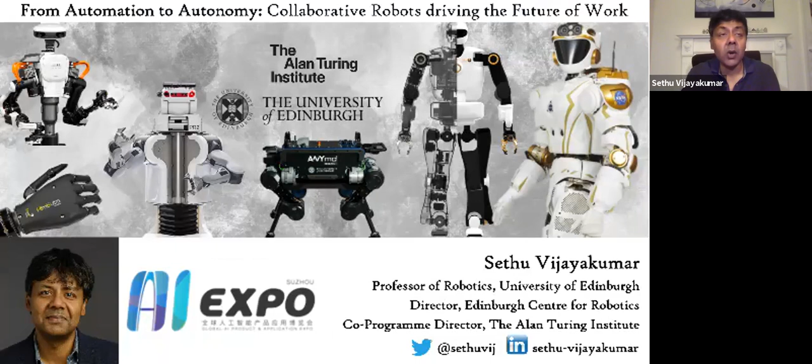So let me start by introducing myself. I'm a professor of robotics at the University of Edinburgh. My name is Sethu Vijayakumar, and I also direct the Edinburgh Centre for Robotics. I'm also the co-program director for Artificial Intelligence and Robotics at the Alan Turing Institute in London.

And today I want to talk to you guys about automation to autonomy. So we have always thought about robotics as a way of automating a lot of work that humans don't want to do, the dull, dirty, and the dangerous.

But I think we have to rethink this definition of robotics. I now think of robotics as something where we use robotics as a tool for doing our everyday work in a much more efficient, in a much more safe, and in a much more productive, economically productive fashion.

So robotics now, I start thinking of it as something which is more as a tool to help you do things better, rather than something which replaces a particular activity or a job that a person does. And that is really going to be the strand of the talk that I'm going to give today.

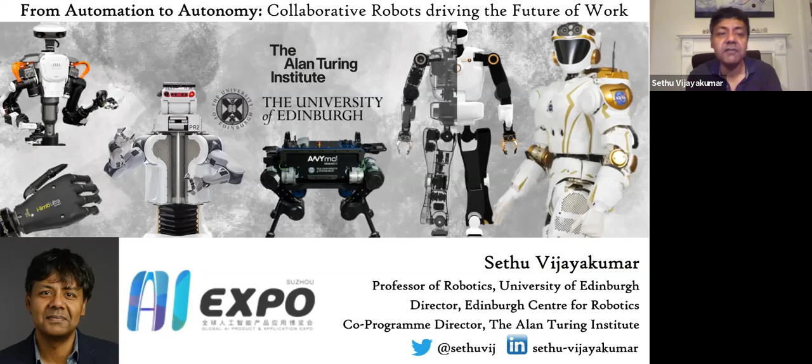I don't need to convince the audience here that robotics is already playing a big part in different walks of our lives, all the way from traditional areas like manufacturing and assembly to very new areas that would not have been possible without robotics, including things like the space industry, underwater robotics for exploration of underwater resources, the nuclear power decommissioning and maintenance industry, and smart cities, autonomous driving, to the healthcare sector, where we have to deal with new challenges in the aging population.

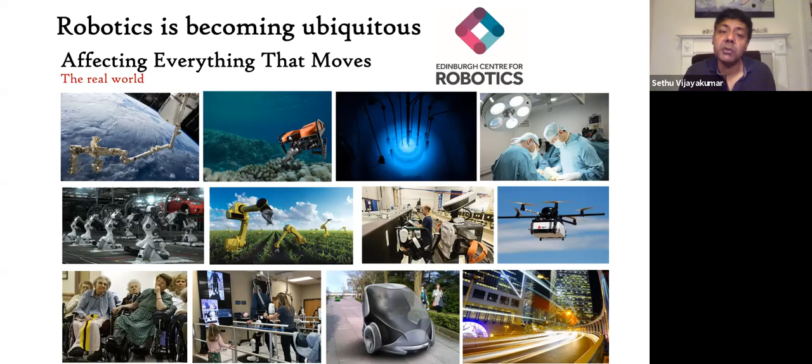As well as in things like an exoskeleton for support of people who've had a stroke.

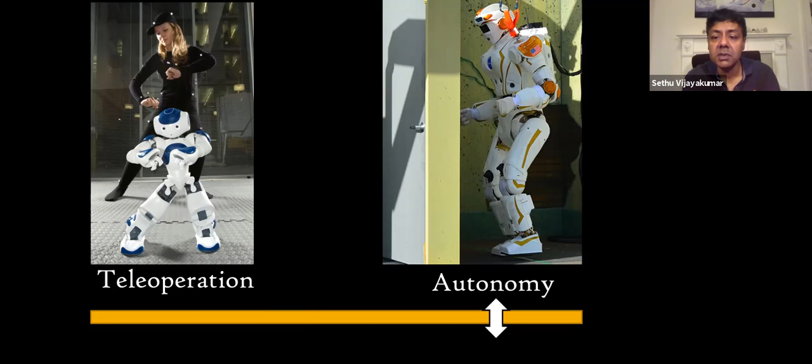There's been a shift in terms of going from traditional ways of doing robotics, like when you program a robot to mimic something that you show the robot to do or program it to do, to new research, both in laboratories and in factories, where we are trying to go towards significantly more autonomy in the systems. In other words, where robots can start making decisions on its own.

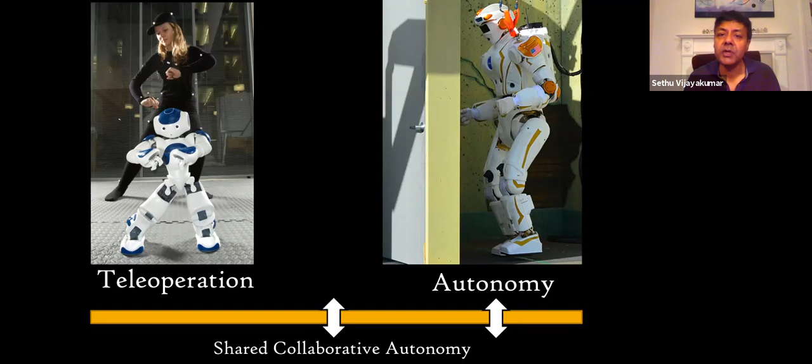So that's great, but I think the next 10 to 15 years, and perhaps even going forward, the biggest challenge will be in trying to seamlessly blend between one extreme of teleoperation and the other extreme of full autonomy in the robotic systems. And this is what I call shared collaborative autonomy, where we can seamlessly move between those two extremes, depending on the task and even within a single task.

And why do I say that this is important? Why is collaborative and shared autonomy important? If you look at the examples that I have listed across in the slide, from all the way from prosthetics and exoskeletons to self-driving cars to things like nuclear decommissioning and humanoid robots, there is a scientific reason for going with collaborative and shared autonomy.

The scientific reason is that full autonomy in robots is still quite a big challenge because of many different factors. We now live in a world where robots are in factories, but they are interacting with humans, with other robots, multiple objects. The real world dynamics are quite hard to model, and you have to work with human intentions, so user intentions, which is notoriously hard to predict. So these are the scientific reasons why we need to look at collaborative and shared autonomy.

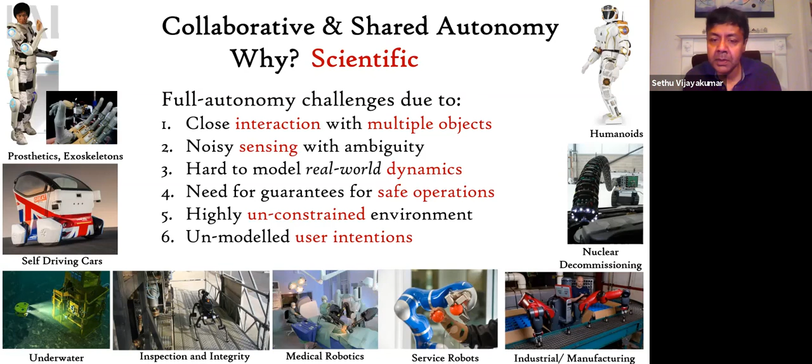But there's also another socio-economic reason. You might ask, why do we want to use automation and robotics at all? The socio-economic reasons for doing that include things like improving the efficiency of man-machine teams so that we can make things a lot more smarter, customizable, and sustainable, economically sustainable, as well as from a huge perspective of food security.

With the growing demands, how do we do things more efficiently? There's also a big factor in terms of hazardous asset inspection in the new infrastructures that we are creating in our cities.

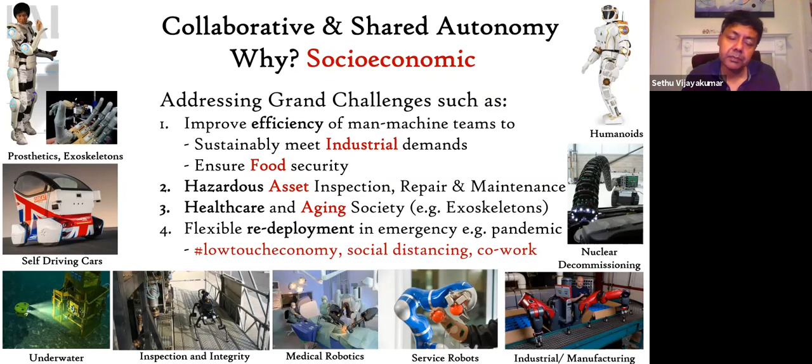On top of that, it's about dealing with challenges like healthcare in the aging society. Now, when all around the world we are facing this challenge, an emergency like a pandemic, we have to worry about how we can deal with a low-touch economy, social distancing, co-work, and robotics has a big role to play in enabling and disrupting traditional supply chains and creating new ways of doing this. So I have listed both the scientific and socio-economic reasons for collaborative and shared autonomy.

So what I want to do next, in the next 5 to 10 minutes, is give you examples of 4 different areas or domains that we already do excellent work in, especially in Edinburgh, in the UK, as part of a nationwide effort in deploying robots in challenging environments, what we call extreme environments.

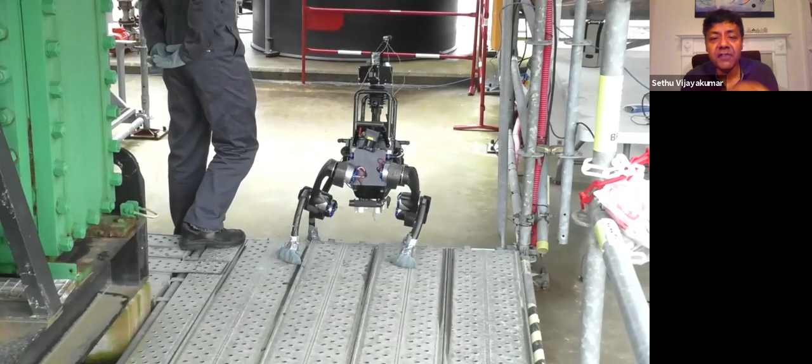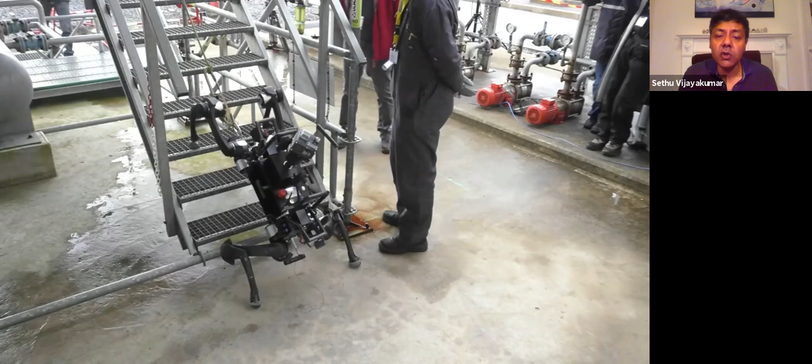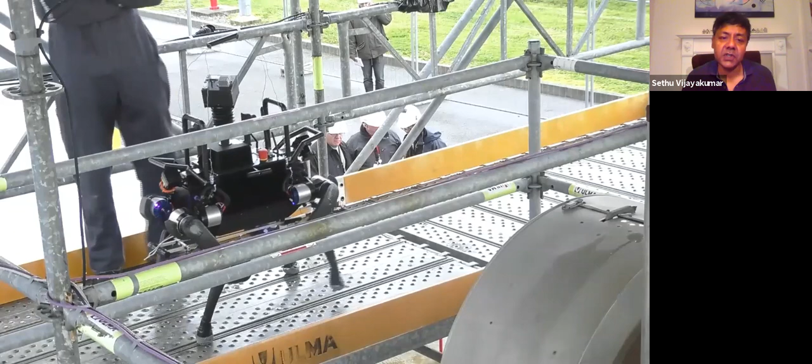One such example is inspection, repair, and maintenance of assets like offshore oil and gas platforms. We have a project called the Orca Hub, where the challenge is to go from wheeled and fixed base robots to legged robots, which can be deployed on platforms like this — offshore platforms where the robot operates in environments built for humans. These are not specific environments doctored for robots, but challenging ones with steps and slippery surfaces, so the machine learning and control challenges arise from effective deployment of robots in such environments.

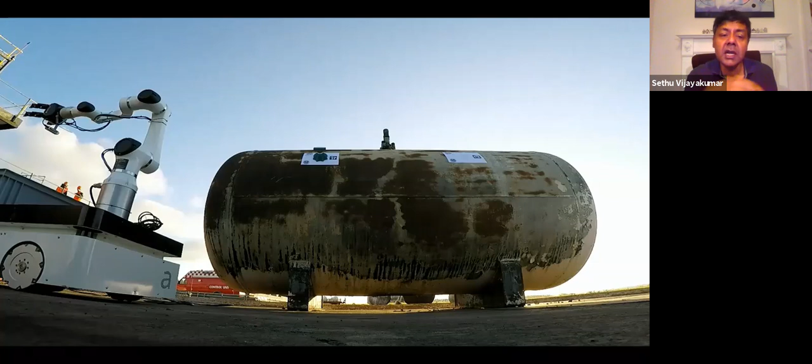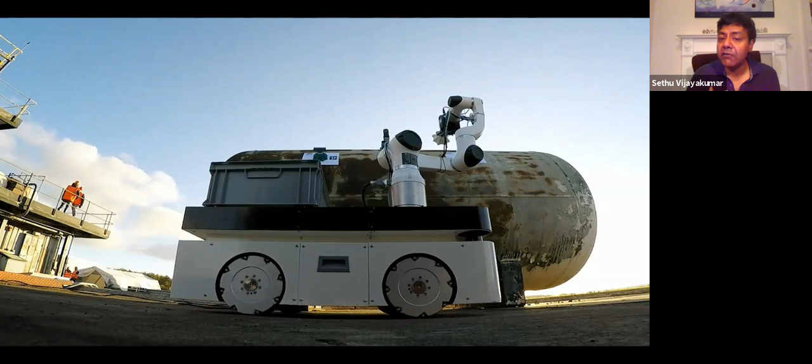One of the things we've been working on is called whole body motion planning. For example, in a live site where we want to test the integrity of industrial structures, we want to deploy sensors very fast, very efficiently, semi-autonomously — having a human in the loop do this test, but not necessarily have the person in close proximity to things that may be dangerous. These are examples of whole body motion planning where humans can give high level goals, but the robot deploys the actual sensor in a collaborative fashion. That's one way of challenging the status quo and using robots effectively.

Another area I'm very interested in is what we call dyadic collaborative manipulation — in simple terms, where humans and robots collaborate with each other to achieve a task, like in car assembly manufacturing. This is research we've been doing in collaboration with the Honda Research Institute, trying to get humans and robots to work together.

This is specifically important in scenarios where social distancing and COVID have forced us to think about working differently — if you've got 2 people in close proximity, the supply chain and manufacturing setting has to be shut down. But if it's a robot and a human, they can continue to work together because there's no issue of social distancing. We want to take these technologies and disrupt settings in interesting, new, challenging environments.

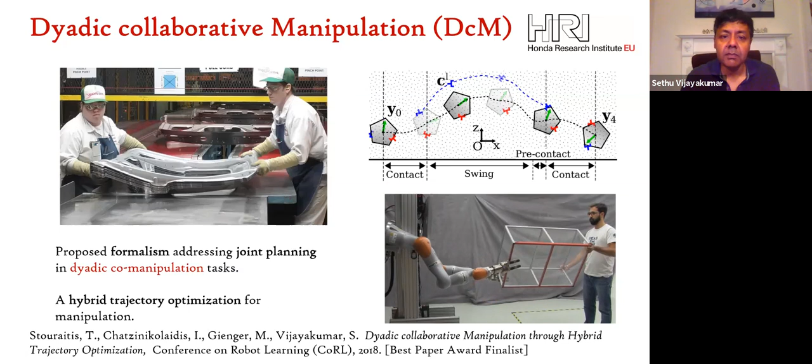The next example is work we're doing in very exotic domains like space — a collaboration with NASA on using robots for the next generation of stations, either on the space station like the ISS, on the Moon, or on Mars. There are two reasons for doing this: one is to make these missions cheaper, the second is safety, since space missions are becoming more expensive and dangerous due to space debris.

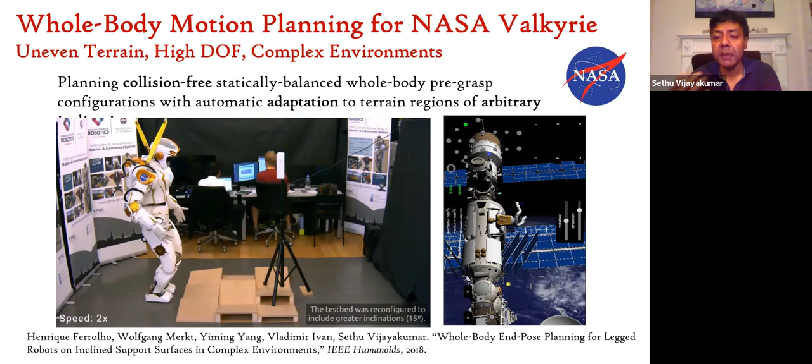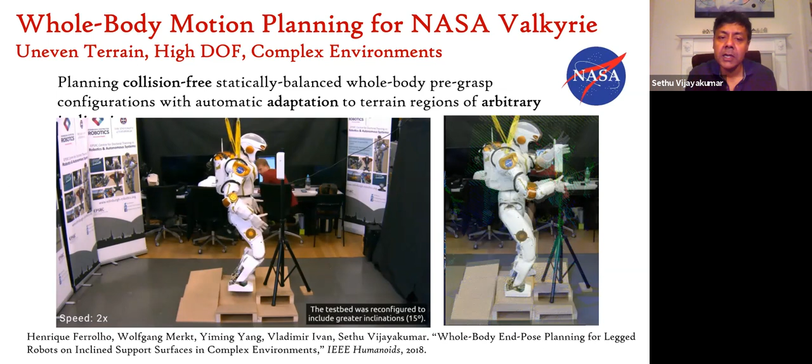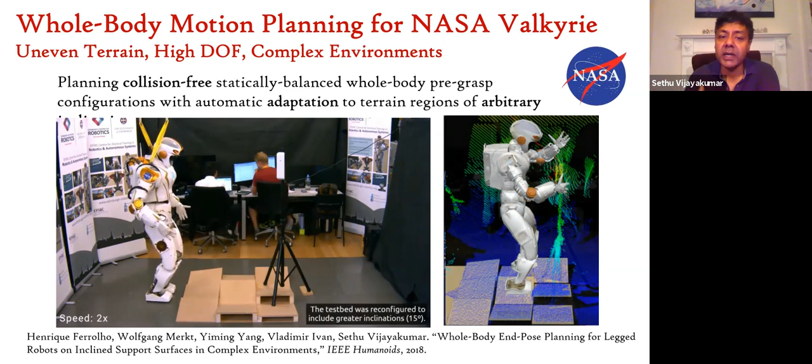We want robots to be able to do significant tasks that astronauts are doing. One of the things we're doing in our lab is taking a very complex robot, like a bipedal humanoid robot, and creating mapping, planning, and control technologies so we get robust, autonomous, semi-autonomous behaviors while this robot is controlled from the space station, outside it, or from another planet like Earth while deployed on the Moon or Mars. We're solving a small part of the puzzle in trying to make planning and control a lot more robust.

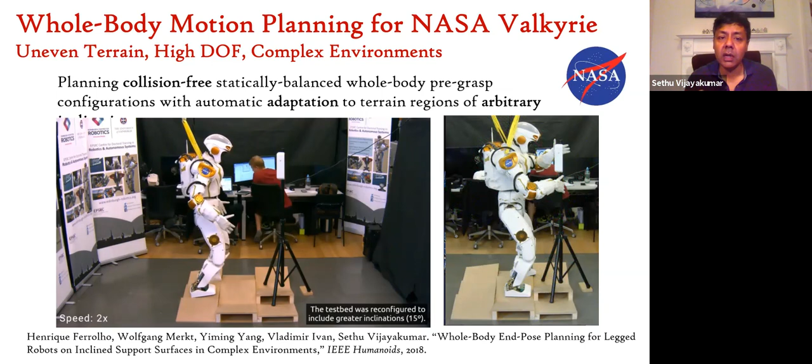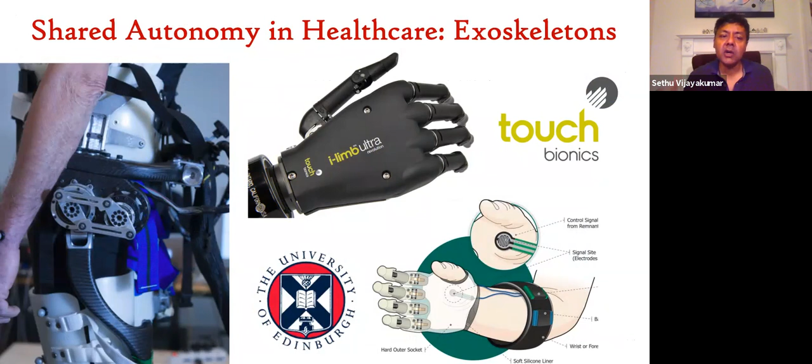And finally, the last example I want to give is what we call shared autonomy in healthcare, where increasingly, to address the challenges of the aging population, for people who've had a stroke or disability, we want to deploy robotic systems to assist them in order to collaboratively help a person, for example, restore walking.

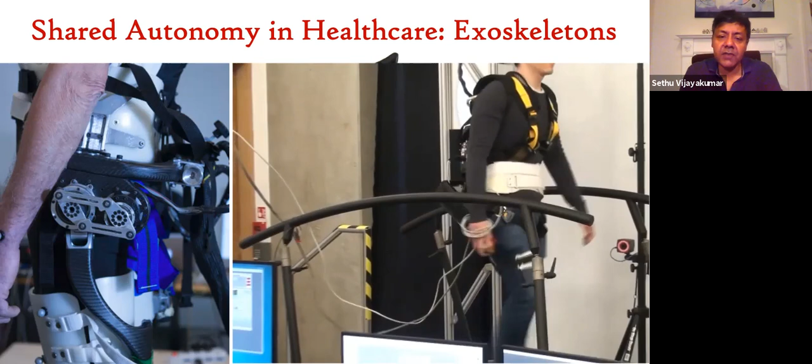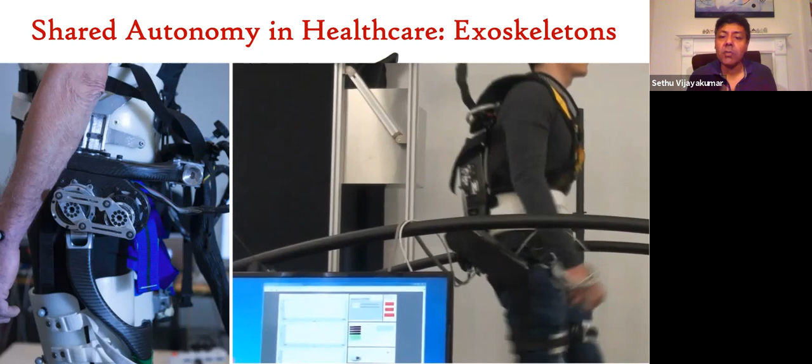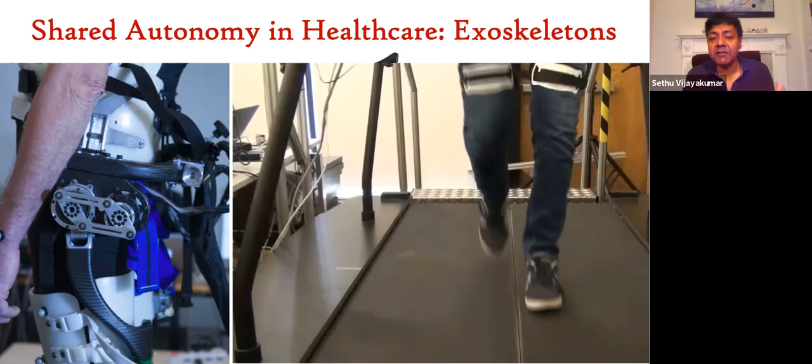So this is some images and videos from our lab where we are using exoskeletons to assist a person to walk more efficiently. If you had a stroke or a unilateral weakness on one side, we are trying to test technology where the exoskeletons can adapt to the gait of the person in order to help them achieve a normal walk, effectively doing the job of a physical trainer or rehabilitation person, potentially in the comfort of your home.

So those were four examples of areas I wanted to highlight. Of course there are many other examples, but I want to shift tack a little and get into the details of some of the machine learning technologies enabling us to address those big challenges. So to summarize, since I have a short time today, I want to cover three areas where machine learning has made a huge difference.

We are already seeing in our labs how this machine learning technology is being translated to new advances in robotics. For example, here we want a setting where a robot is working in a remote environment while a human sees a console on the right and controls this robot. This is what we call punctuated autonomy, where at the remote live site a dual-arm robot navigates through a scenario, avoiding obstacles, removing debris, and making local decisions on its own about how to move debris, which arm to use, and how to navigate a complex, cluttered scenario using local sensing. The human watching the console is only monitoring and giving high-level goals.

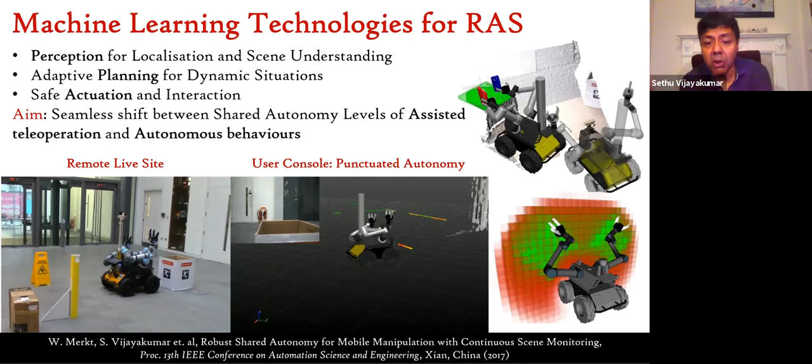The machine learning technologies that have enabled us to do this include perception for localization and scene understanding, adaptive planning, and safe actuation and interaction. As I said at the beginning of my talk, the aim is not to do either full autonomy or teleoperation, but to be able to seamlessly shift between these levels of assisted teleoperation and autonomous behavior very smoothly. That is what will let us deploy these platforms very successfully in challenging environments.

This is not new. In science fiction, in settings like Iron Man, we've already seen a vision of operating multiple robots and devices from the comfort of your home while minimizing cognitive load on the person operating it. This vision has been around, but now we are finally seeing it deployed because of necessities like the pandemic, new kinds of work we want to do, and a more efficient economy.

I've got a couple more slides, but this is one of the most important in my opinion, because I want to focus on the underlying open scientific challenges for the next generation. These are the three points I want to make to the audience, in terms of where we should be putting our efforts.

The first is, how do we make sure the technology is safe for dynamic human interaction, human-robot interaction? You can do this in one of two ways. You can do it in software—we are doing some work on real-time adaptation using things like model predictive control, so that things are very adaptive and reactive to changing environments.

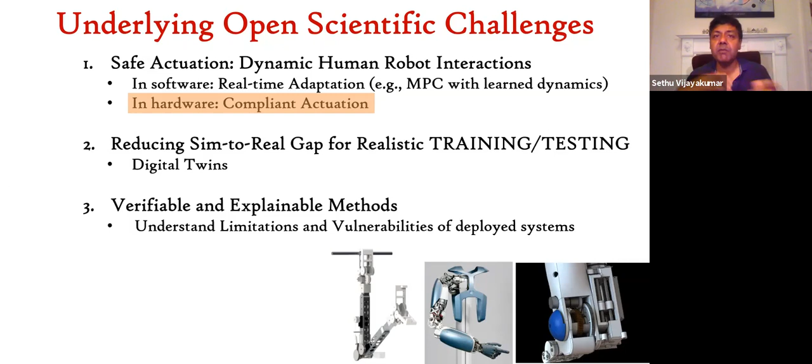But the second way, one of the key areas we work on, is what we call compliant actuation—creating new kinds of actuators and robots that have the inherent ability to be safe even before we add the software. So in case of failure, we won't have catastrophic outcomes in terms of injury, and this is very important. This work on compliant, efficient actuation involves putting springs between joints so they are inherently compliant while still being accurate and safe.

The second big challenge, in my opinion, is trying to reduce the sim-to-real gap.

In other words, we need what we call digital twins, technologies for training and testing in the virtual environment, so that we can do extensive experiments, collect data, and do testing in digital twins, because we will never have the chance to collect enough data in enough scenarios to do extensive testing with real robotic solutions. So we are putting a lot of effort into trying to build realistic digital twins on which a lot of machine learning tools and testing can be done before testing on real world platforms.

And finally, this is a very important point: we as scientists and researchers have to build techniques that are verifiable and explainable. So for example, if something goes wrong, can we find out what is the reason for the failure of such methodologies? That's why we are building technologies that are not just deployable where we say, oh, this is great because this works well. We need to understand the limitations of some of these methods.

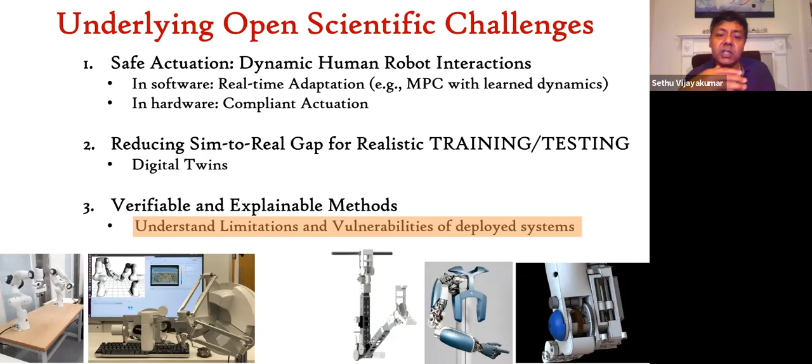And that is when we will achieve the best kind of resilience, when we understand the limitations and vulnerabilities of our deployed systems effectively, to understand where we should use it and where we should not use it, and when something goes wrong, can we explain why this has gone wrong so that it does not happen again. So this is, in my opinion, the biggest challenge: understanding limitations and vulnerabilities of deployed systems.

And finally, I want to conclude by saying that in this talk I have not touched upon some of the other important questions we need to worry about in the deployment of AI and robotics technologies. Things like moral and ethical use of AI, so that people are not disadvantaged, a particular set of people or class of people are not disadvantaged. We need to make sure decisions that AI systems make are unbiased, so that we do not have uneven economic distribution between communities.

We need to make sure things are secure, because the more interconnected systems you have, there's a danger for things to be hacked or taken over. Ransomware is a big question. And as I mentioned in my previous slide, responsibility and explainability for causal inference is very important.

The other thing is, when we talk about transferring control, when do we transfer control? How fast do we transfer control? For how long do we transfer control? And when do we switch back control between the human operator and autonomous systems? How do we seamlessly go between shared autonomy systems? This is extremely important in smart cities, in autonomous driving cars, and even more in environments within our own home.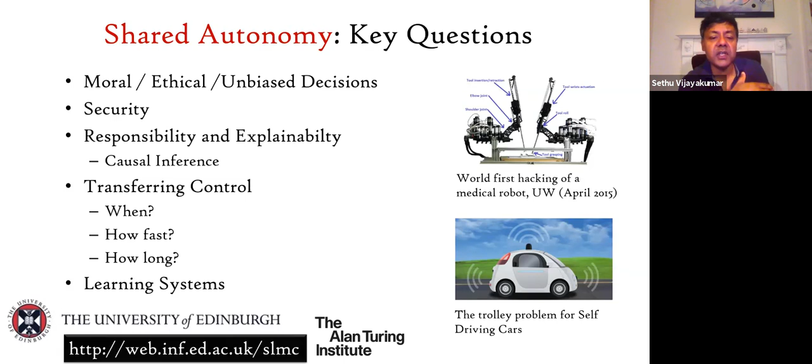This becomes increasingly challenging when we have learning systems, because learning systems are hard to predict as things are constantly changing. To address all of these things, we are, both at the University of Edinburgh and at the Alan Turing Institute, and in my group, which I have put a link to on the webpage, addressing all of these challenges in addition to developing new technologies, both hardware and software, in robotics and AI. We are trying to tackle all of these things simultaneously. You cannot build and push technology down the throat of a user without understanding and addressing all of these challenges listed on the slide here.